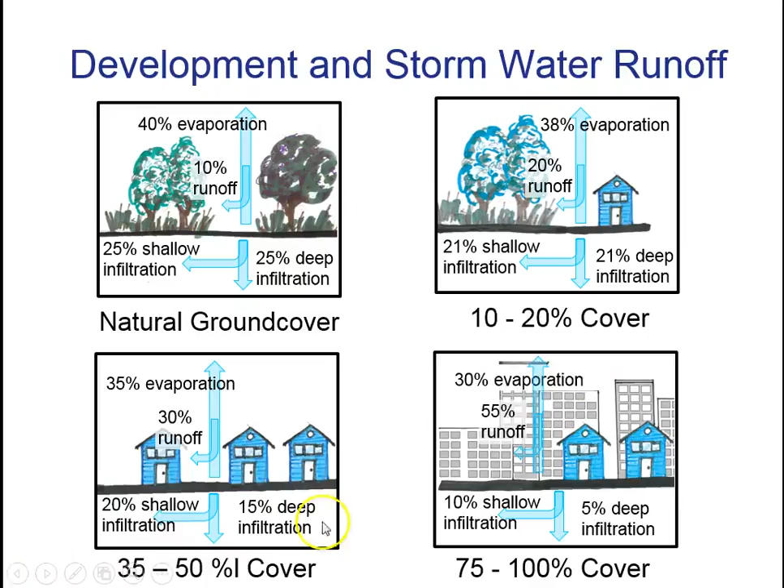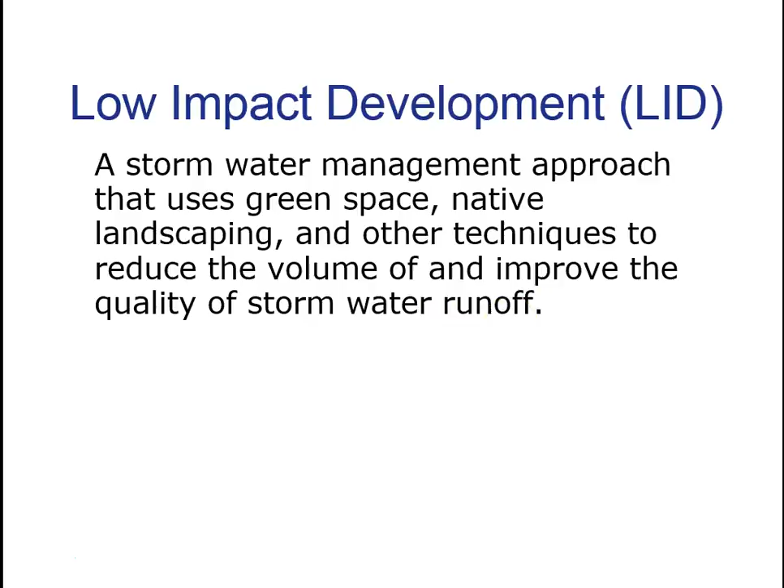Runoff causes problems with pollutants. We want to have low impact when we develop. We want the ground to continue to look like that natural state where we've got all the water infiltrating into the ground and we have enough water going back to evaporation. We don't want runoff. No matter if it's a tiny bit of rain or if it's a big flash flood, we don't want a lot of runoff.

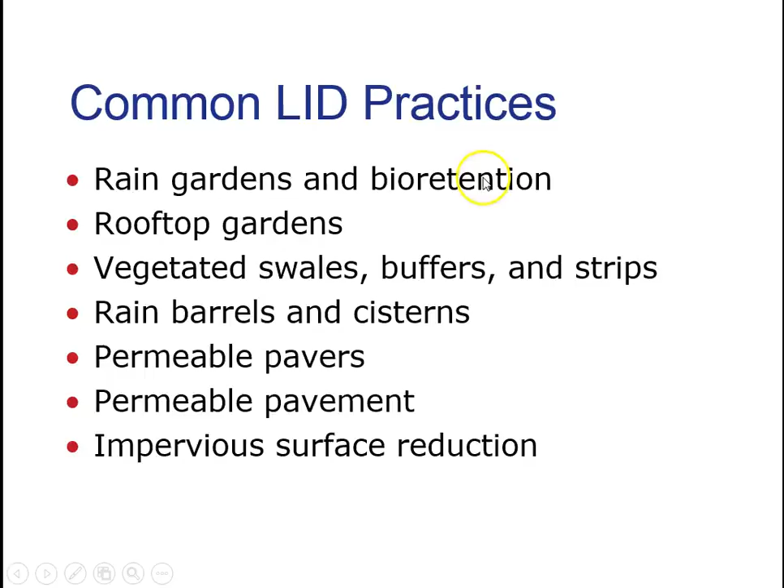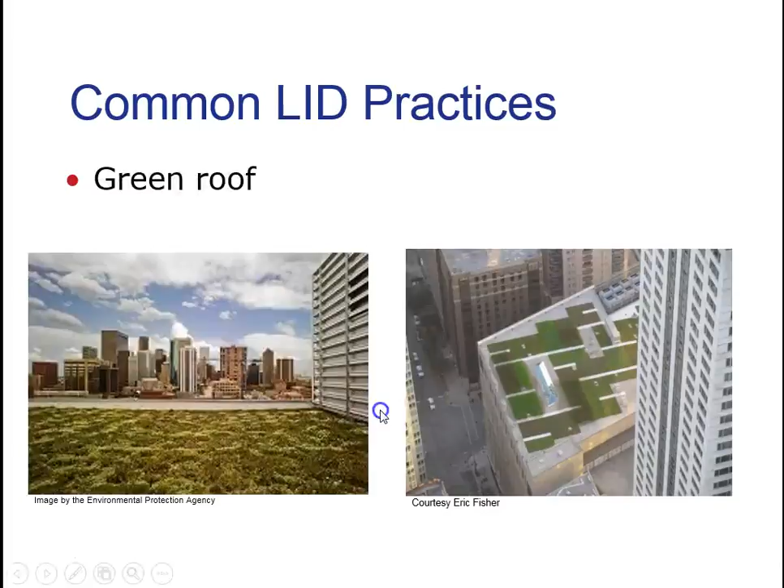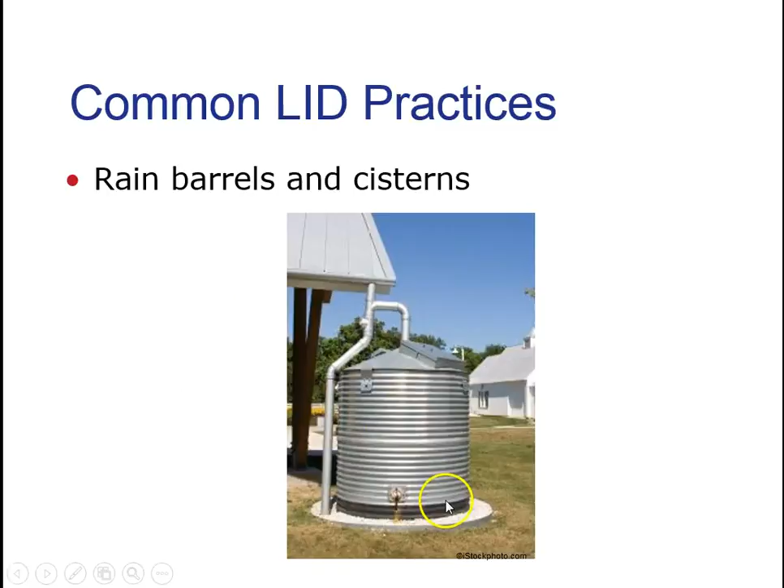Rain barrels and cisterns. Cisterns are just these bigger ones that catch rainwater. Do note that various states have laws against catching rainwater. So this does depend on what state, what city, what county you're talking about, whether you can catch your own rainwater and then use it to water your lawn or those things.

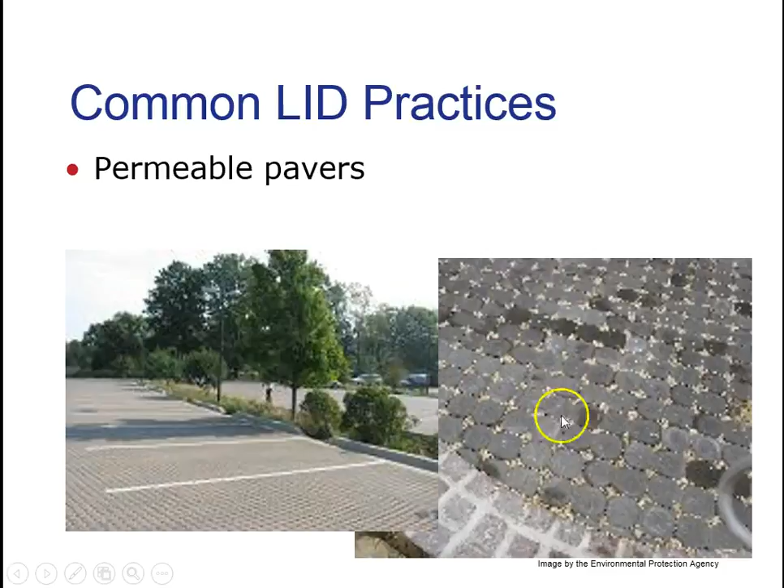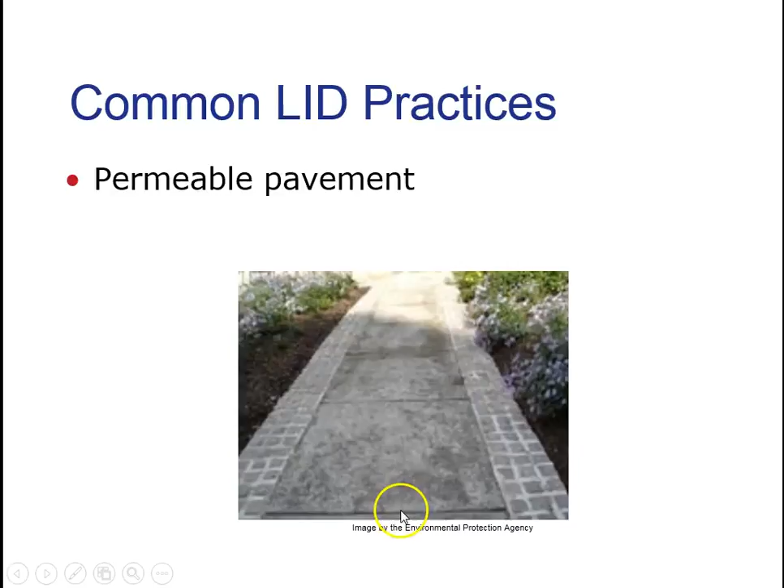Permeable pavers. So this is actually, instead of a solid concrete sheet that would just cause the water to run off, this actually has little gravel in between each of these so that some of the water can filter down through it. This cuts down on that runoff. They also make concrete now that can also have some of the water go down through it and infiltrate the ground instead of all running off.

So this is impervious surface reduction. This is saying we're reducing how much of the surface is impervious, so some of the water can go through. These are some new products, and this is a really good thing. Okay.

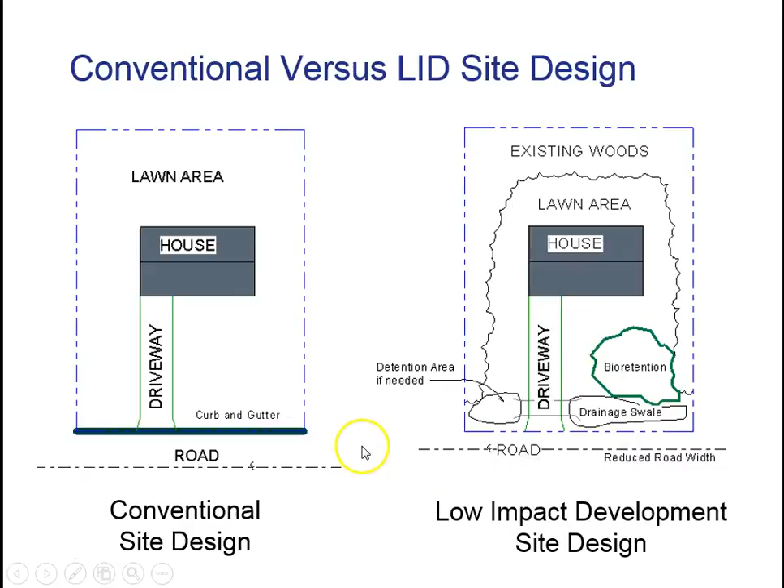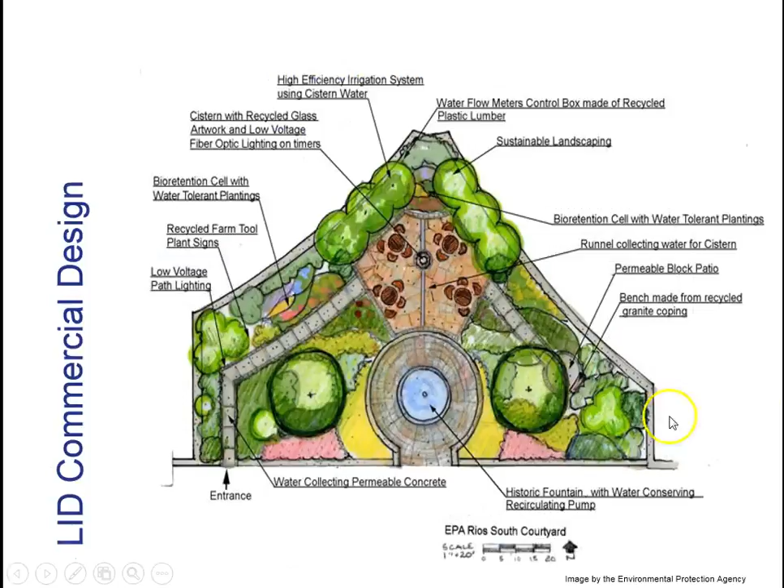We put in a section here with like a raised bed that keeps this water from our area from running over out into here. And they've reduced the width of the roadway. Roadways are generally impervious, so a lot of water goes rushing down here. And here we've reduced that size. Take a minute and look at the various parts on this sketch. Read through all of these and see if they make sense with what we just saw.

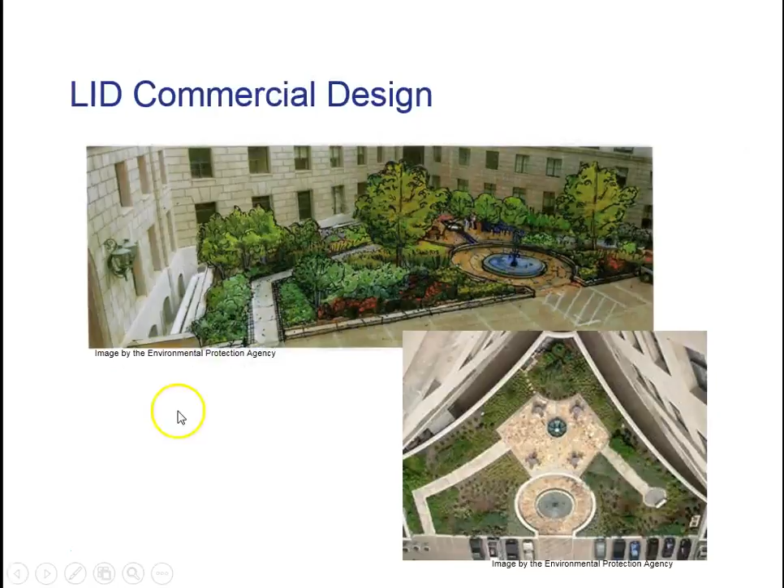Here's some more diagrams. These are other diagrams of the one from the previous page. You may want to go back on the video and look at that versus what they've actually built. And that's it.